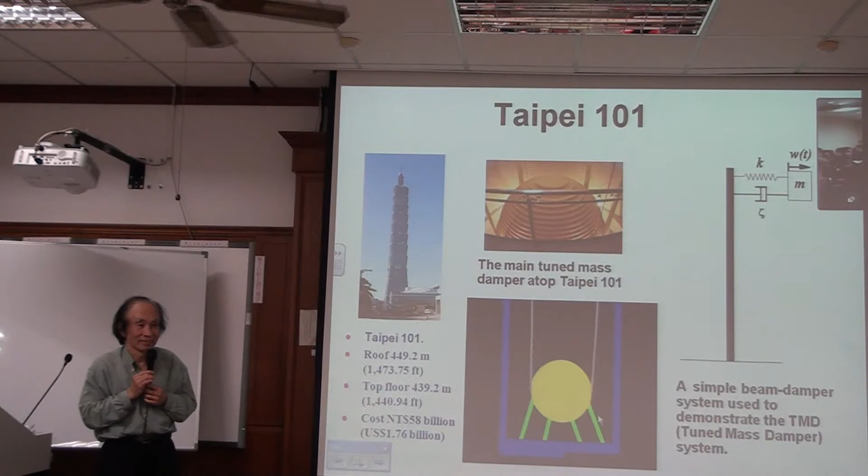Understand that? So I say 101 is safe, at least from this point of view. However, now if it's a different kind of earthquake, your earthquake frequency higher than 15 hertz, then you are out of luck. That means this control design doesn't solve all the problems, only part of it.

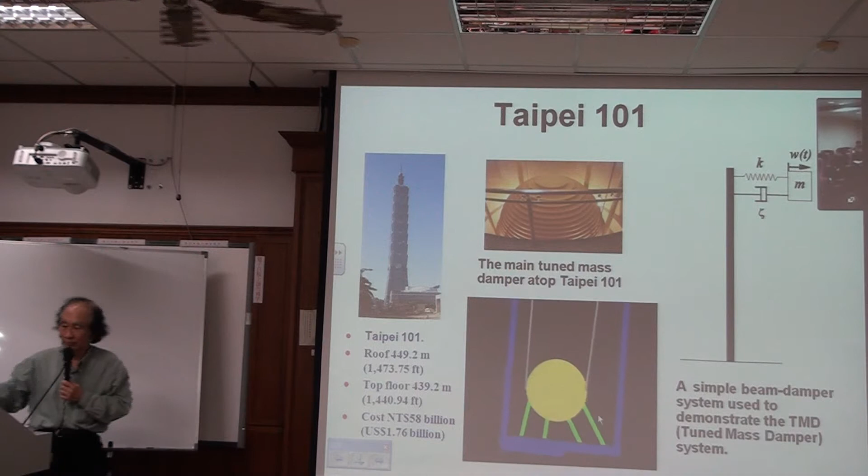Okay, now this is another design in the Citicorp Tower. In the whole world, most of the buildings in earthquake zones do have this kind of tuned mass damper in the building. However, in New York, they don't have earthquakes. Then why do they do this?

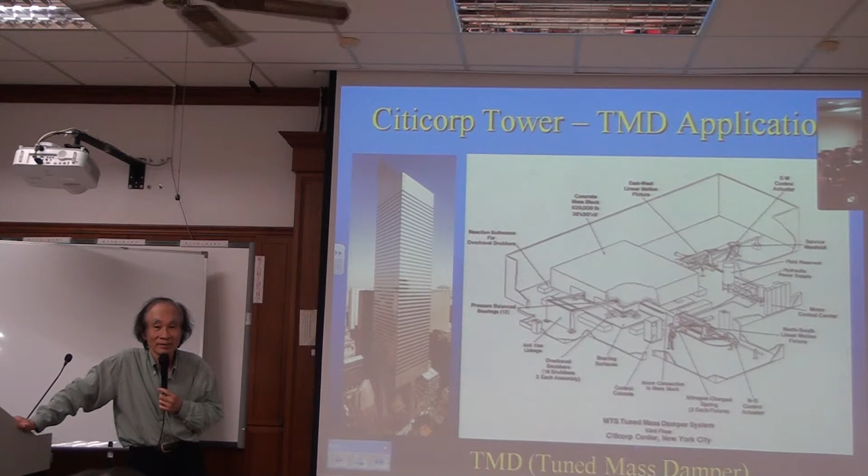Wind. Yeah, wind. Yes, because of the wind. In New York, we don't really get earthquakes, but 2 years ago we had one earthquake, but that's only once in 1 to 100 years. It's not as strong as in Japan or Taiwan. So their design for the tuned mass damper is because of the strong wind in New York.

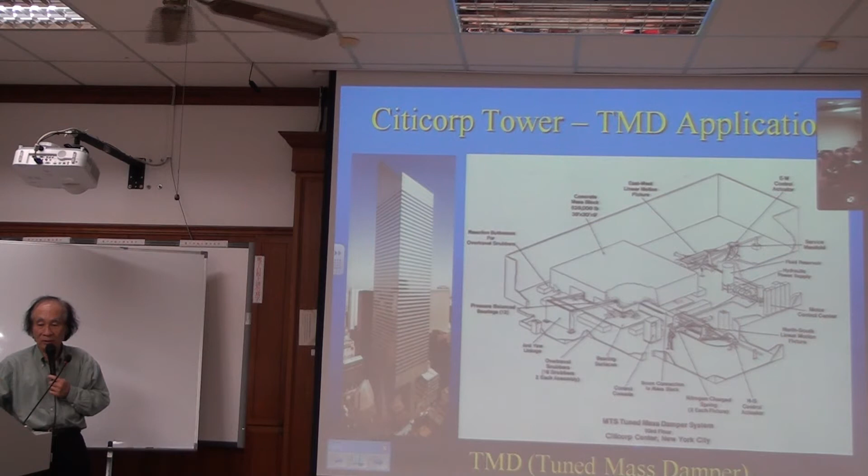And their design is a little different, this is the old design. The 101 design is a new design, so this is the old design. But you can see that the old design uses the same principles, the same differential equations, but design-wise, the devices are different. They have a different way. That's all the kinds of design available in the market these days.

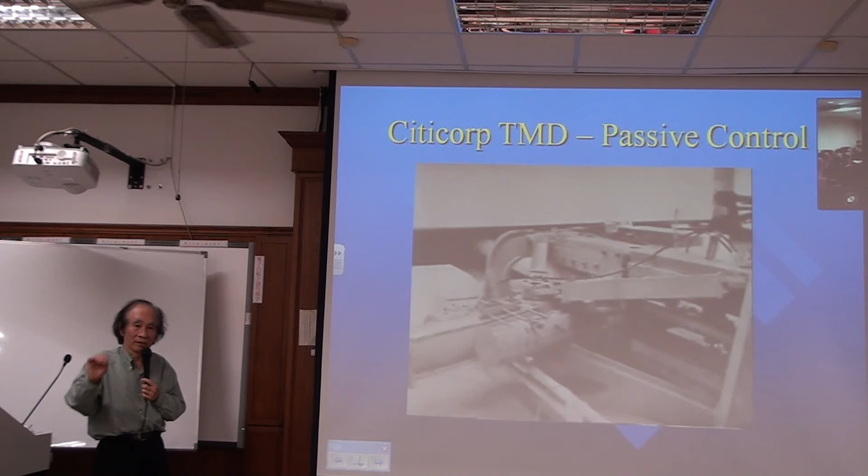But again, they use the same differential equations, the same controller design, the same tuned mass principles.

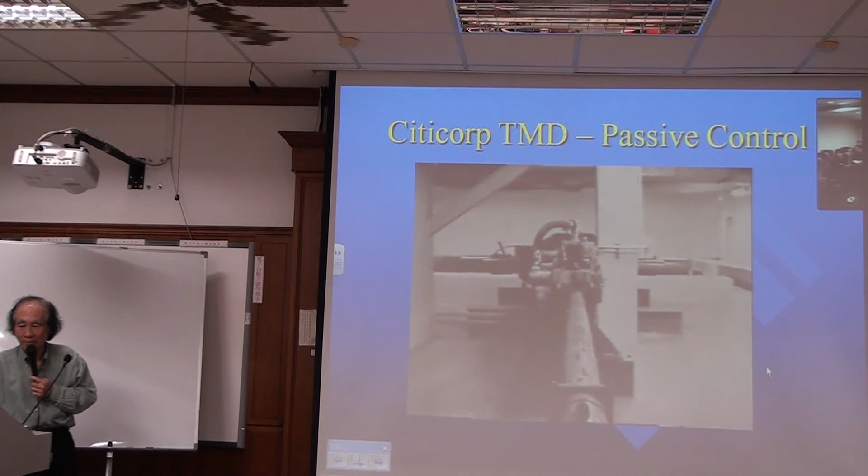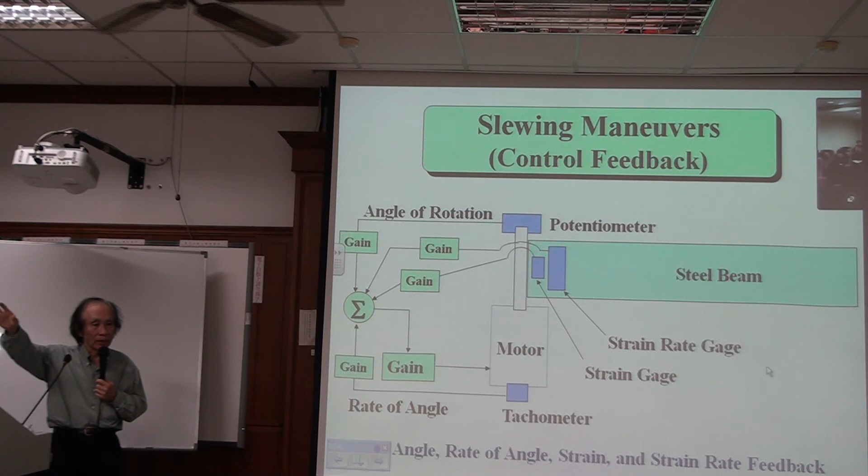Okay, all right, now let's move to what I call slewing maneuvers. This is the design I worked on when I was at NASA about 20 years ago, probably more, 25 years ago. At that time, did you hear, you're too young, I don't think you heard anything about Star Wars. You hear about Star Wars?